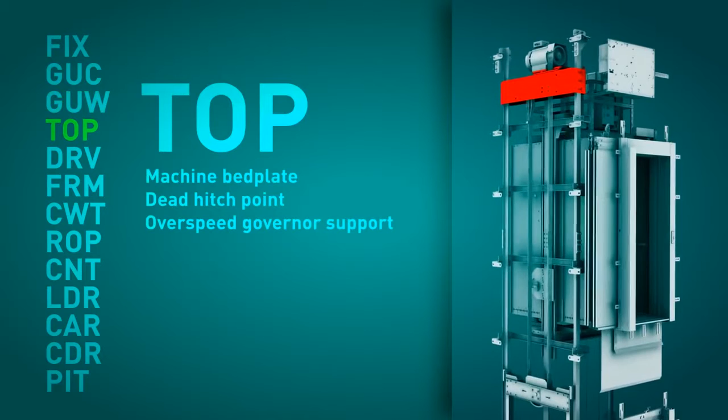Each module can be made up of one or more packages. These packages are identified with a description of the module and its position within the assembly sequence. The supply of the elevator has been designed to fit what we consider to be the logical assembly sequence of a machine roomless elevator.

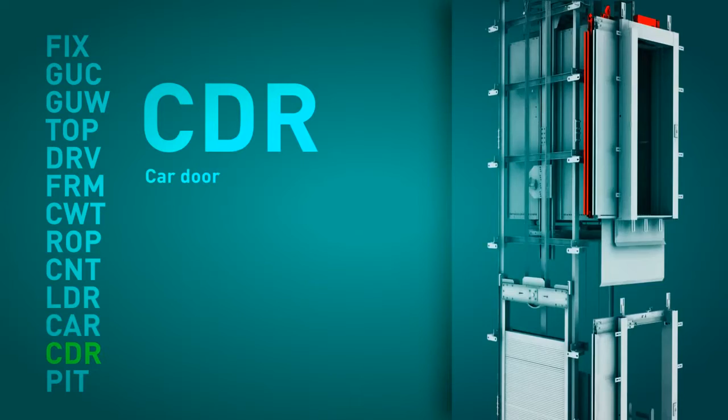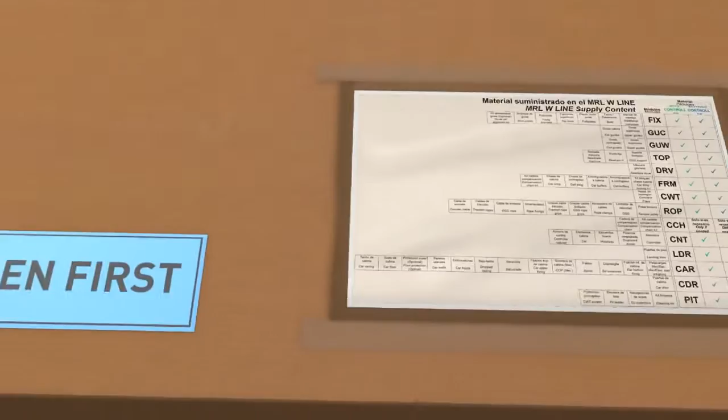The package that we have to open first is labeled and easily identifiable. Attached to this package, in a protective plastic cover, is the packing list and a document which details and lists the material supplied in each of the various modules.

In this first package, we can find the assembly manual of the elevator and all the assembly handbooks of the individual components. Before starting the assembly process, we strongly recommend the assembly technicians read all the manuals in detail.

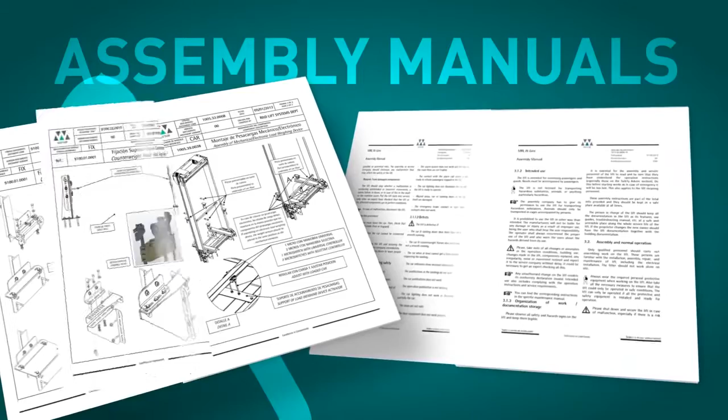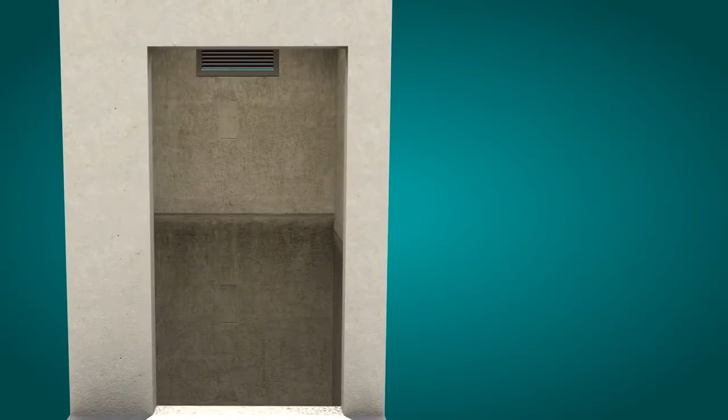The assembly of the MRL W LINE starts by checking that the conditions of the shaft, dimensions, cleanliness are satisfactory and that all the necessary material and auxiliary tools are available on site. The guide rail sole plate must be correctly positioned and levelled according to the assembly manual.

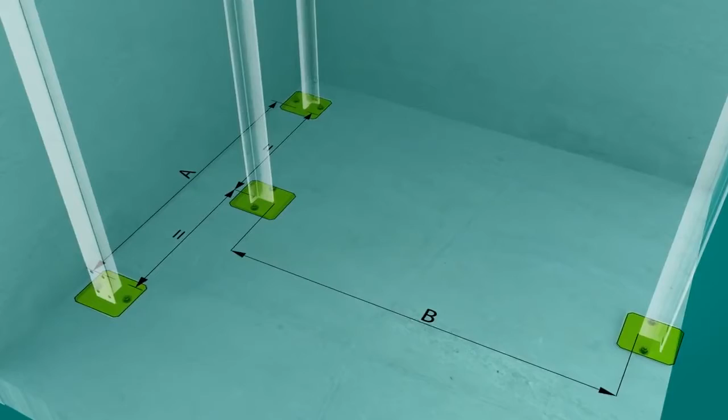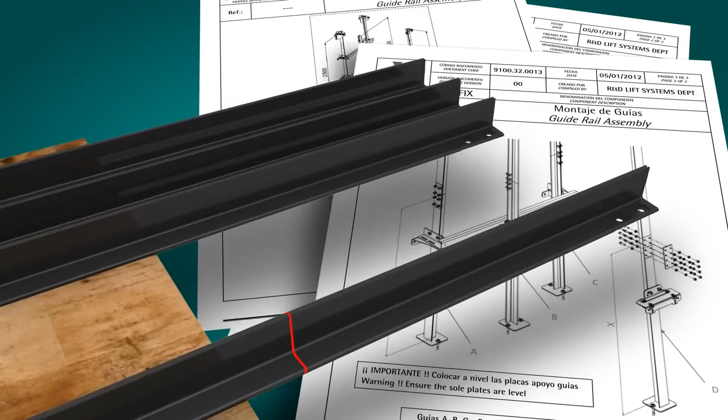The bottom portions of the car and counterweight guide rails are cut and assembled according to the installation drawings. Should there be a difference between the pit depth given in the installation drawings and the as-built depth, the bottom guide rail can be adjusted and cut to the right length.

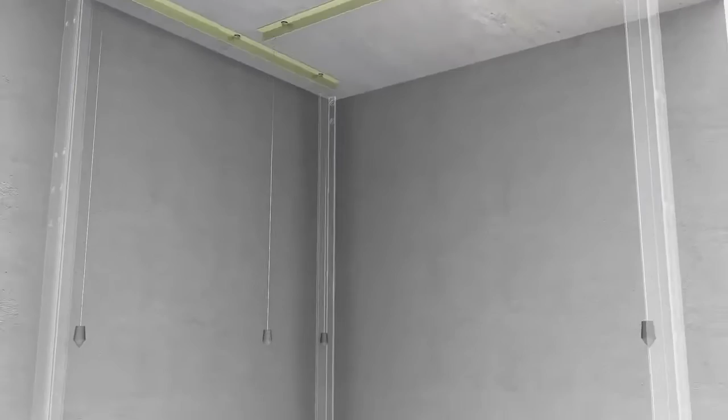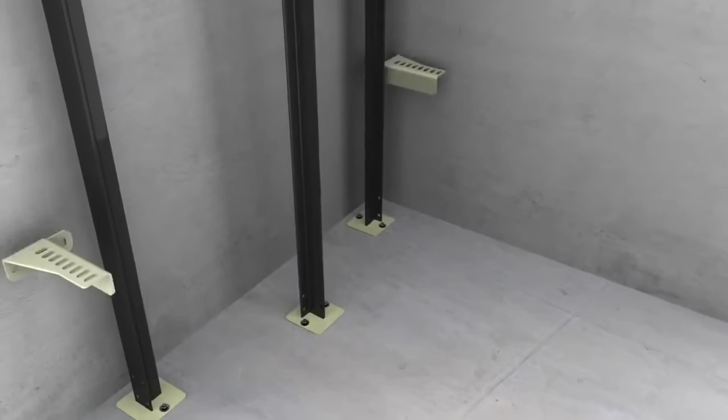A tool to help align the guide rails is recommended in order to guarantee a correct assembly. Wittur can supply a guide rail alignment kit upon request. The first row of guide rail supports is assembled. Their position is detailed in the installation manual.

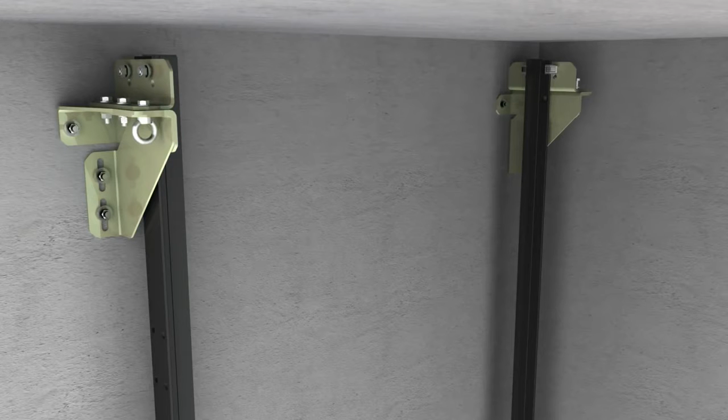With the help of some scaffold platforms, the successive guide rail portions, 2.5 meters or 5 meters, are assembled with their corresponding support brackets. Once the last section of the counterweight guide rail has been assembled, the topmost bracket can be fixed into place. The last portion of the car guide rail fixed to the bed plate is assembled once the machine support has been installed.

Alternatively, the process of assembling the guide rails can be carried out from a temporary platform which is fixed to the guide rails that have already been mounted and lifted up through the shaft by means of a block and tackle.

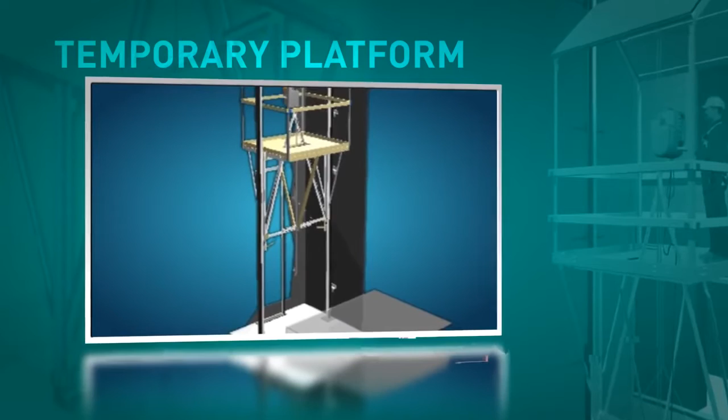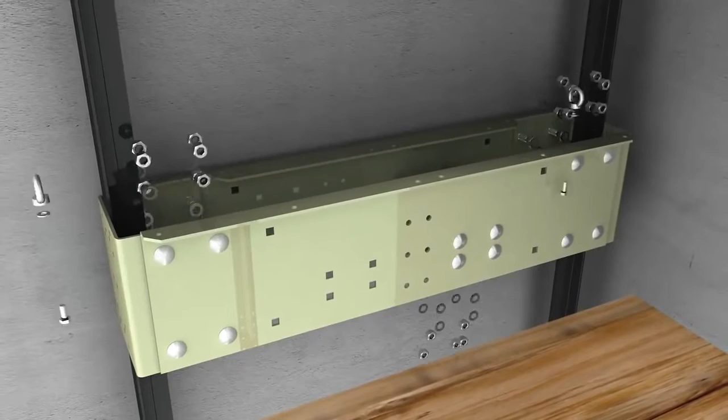The machine bed plate is assembled next. A comfort kit is standard supply for 1.6 meters per second, but optional, though highly recommended, for 1 meter per second. These low-frequency metallic cushions absorb any vibrations that the system may produce.

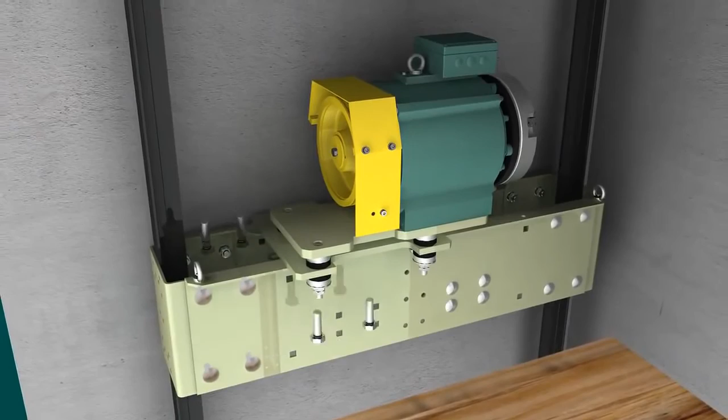The machine is fixed to its support and is lifted and guided into position with the help of a block and tackle. It is fixed to the sheave side with the fixings provided, and once the machine is level, these fixings and the clamp can be tightened. Once the machine is in place, the penultimate guide rail support and the last section of car guide rail fixed to the bed plate can be assembled.

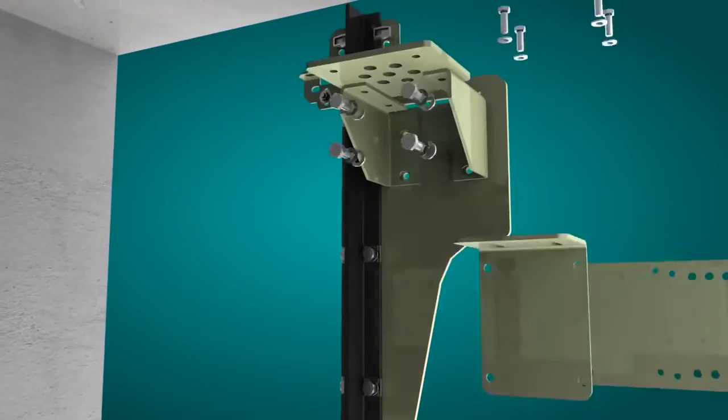The dead hitch point can now be assembled, followed by the overspeed governor and the slack cable control device, should it be applicable. At this point, all the mechanical elements of the elevator are assembled in the headroom.

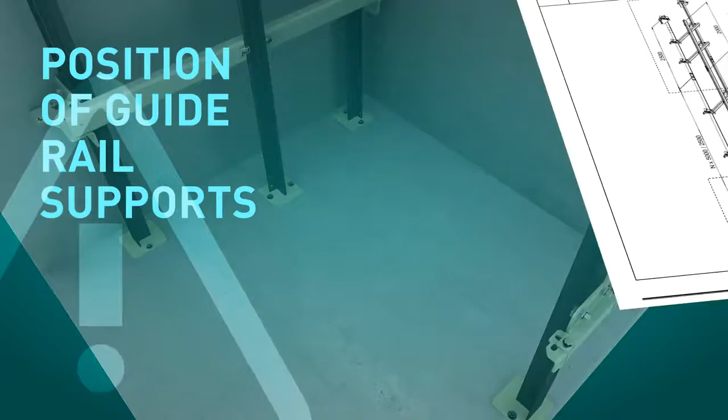All the guide rail supports must be placed in the positions detailed in the installation drawings. The position of the top and bottom brackets is of special importance. Any scaffolding and platforms should be removed at this point. It is now time to go into the pit.

In the module FRM, we will find all the components relating to the car and counterweight frames and the buffers. The counterweight buffers should be assembled first of all in the position detailed in the installation drawings. Resting on its buffers, the counterweight frame is then assembled.

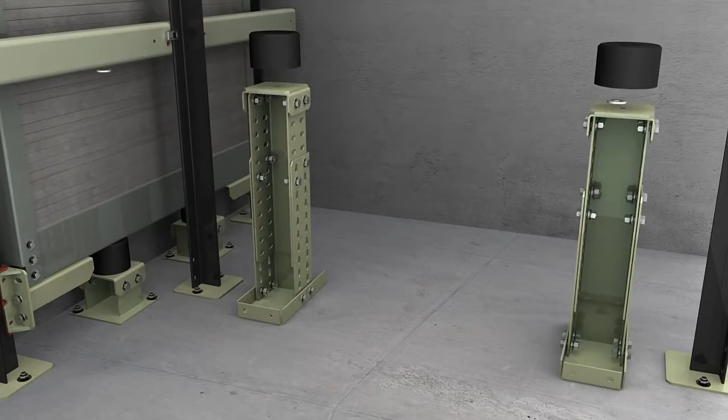A partial loading of the counterweight should then be carried out, according to the individual assembly requirements of each elevator. The car buffers are assembled next, in the position detailed in the installation drawings. Resting on its buffers, and on the car floor, the car frame is assembled. As an optional accessory, Wittur offers a temporary protection to protect the car floor whilst the assembly process is taking

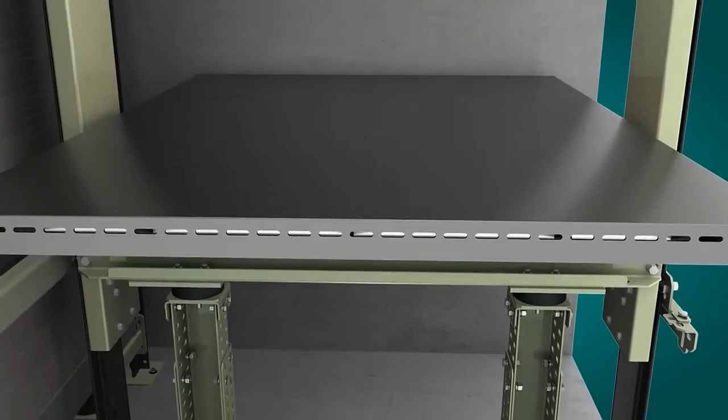place. The slings are now correctly assembled and positioned within the shaft and between the guide rails, and it is time to suspend the car slings in order to assemble the traction ropes. All the necessary material is supplied in the module ROP. The machine should previously have been connected to the power with the encoder cable.

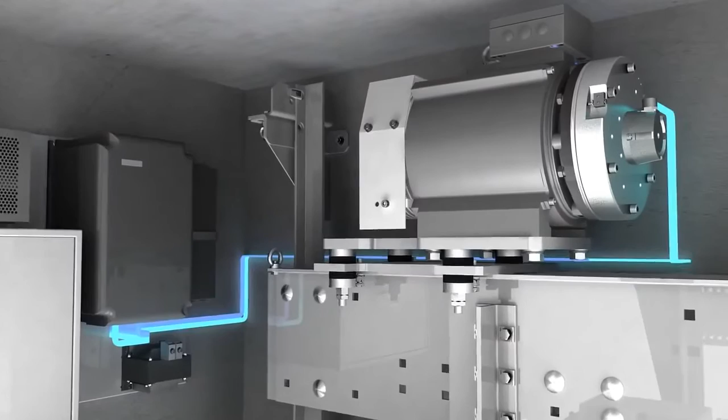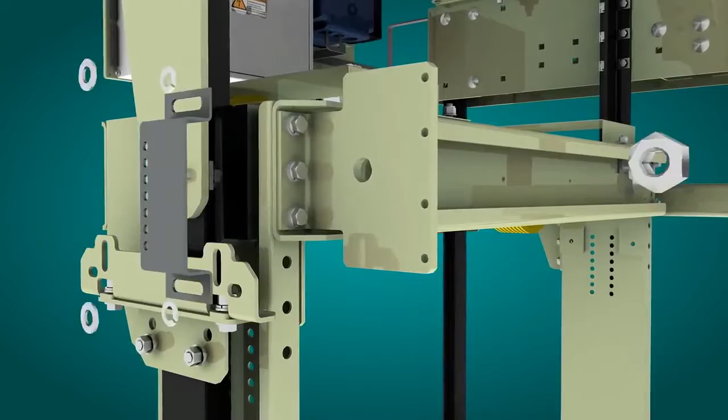The car sling is then lifted with a block and tackle to the highest floor that allows the floor of the car to lie flush with the landing FFL. Its position is maintained by means of the car frame locking kit. This element has not been designed to specifically suspend the car, but to fulfill the function indicated in clause 6.4.3.1 of the standard EN 81-1 A3.

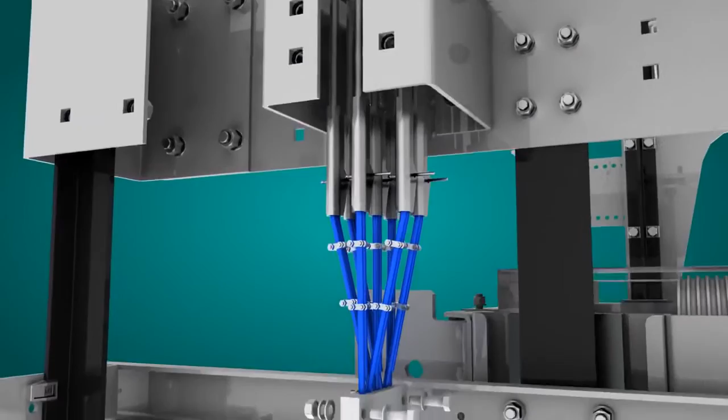For the assembling of the traction ropes, please follow the instructions detailed in the elevator's installation manual. Repeat the process as many times as needed. A rope clasp guarantees the correct alignment of the ropes as they are fed into the grooves of the sheave.

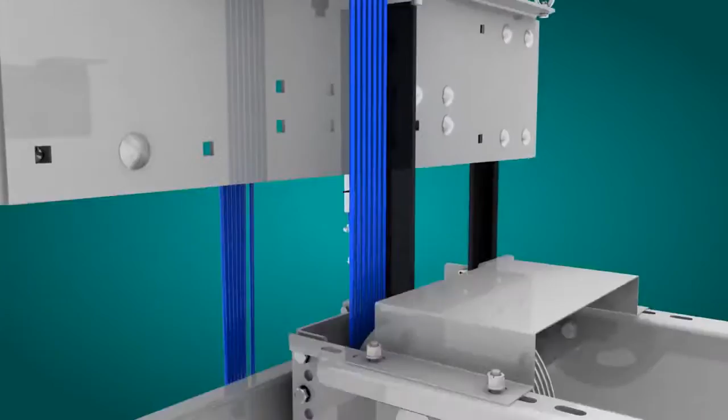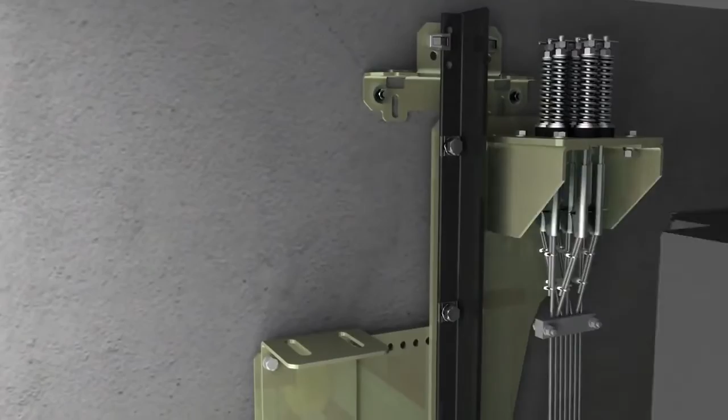The next step is the assembly of the overspeed governor, its tension weight and the cable that joins them. The fixing of the overspeed governor cable to the frame is the last stage of this subassembly. At this stage, the elevator can be used as an elevating platform with the use of an assembly operating panel. The elevator must be handled with great care during these journeys. With the help of the elevating platform, the landing doors are assembled.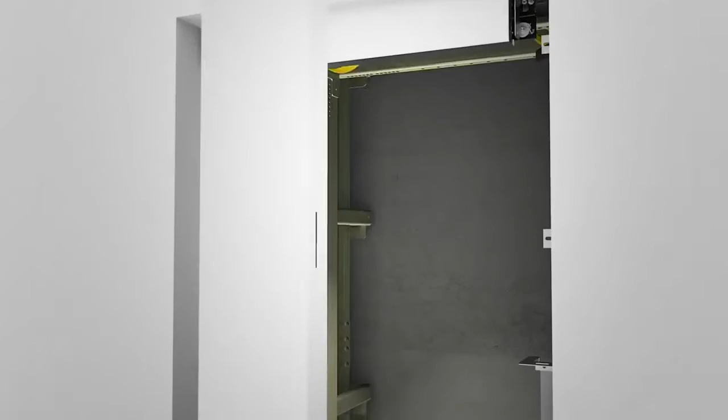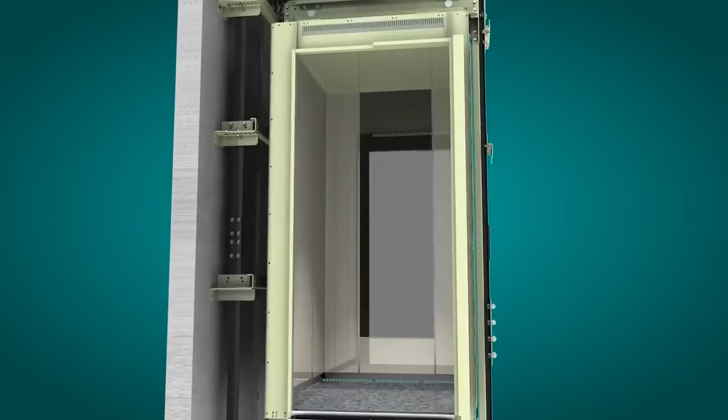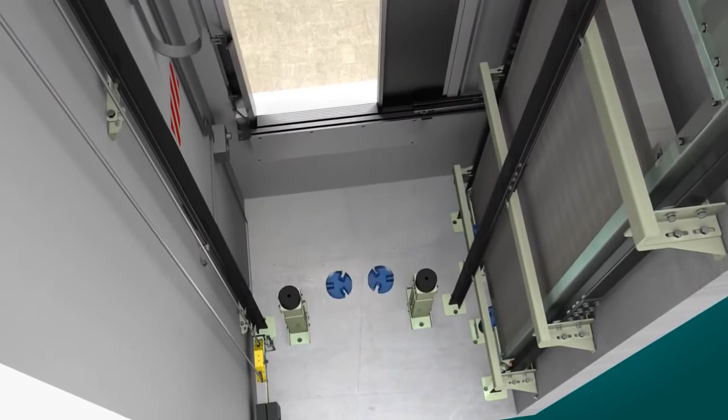Before starting the assembly of the car, it is essential to mechanically block the car frame and to remove the floor protection should it have been used. It is now time to assemble the car door. The pit components can now be put into place. The counterweight screen is fixed to the guide rails, and should it be applicable, the pit ladder is fixed inside the pit. From this point onwards, the electrical elements can be assembled.

The MRLW line controller, with its plug-and-play concept, is probably one of the market's most easy and intuitive controllers to install. It is delivered perfectly packed and identified in 4 packages: power and control, pre-assembled electrical installation of the shaft, electrical elements of the car, and the controller cabinet. In each of these packages there are various assembly kits, each one accompanied by a description of its contents and an assembly manual, numbered according to the assembly sequence.

The controller cabinet, with its reduced dimensions, is placed neatly in front of the frame of the landing door located on the last floor. The simplicity of the controller does not reflect its features. The MRLW line controller can be supplied also according to other standards, such as EN 81-70 and EN 81-73. Upon request, it can also be adapted to the EN 81-71 and EN 81-72.

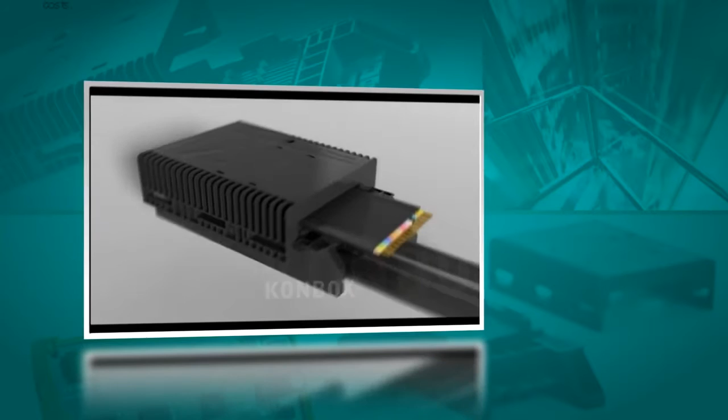Our pre-assembled electrical installation uses the KONBOX system, which greatly reduces the assembly time, guarantees the quality of the CAN bus signals, and sets us apart from our competitors. The flat cable is manufactured with highly resistant and durable materials, which guarantee an optimal protection of the low-frequency CAN bus signals. An absolute positioning system of the car by means of a 4096 pulse encoder is optional. This makes assembly easier and guarantees millimetric precision of each stop.

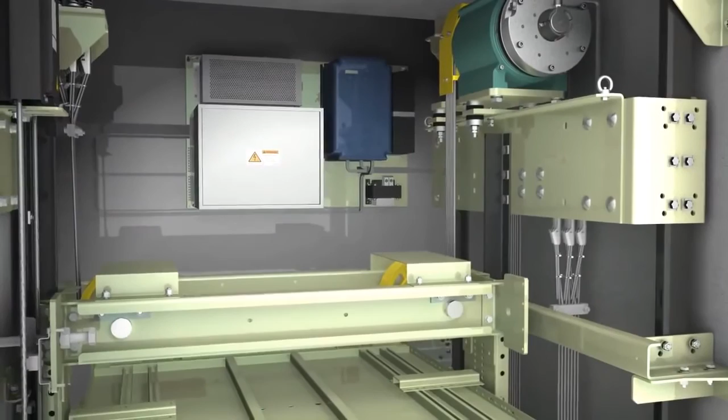The penultimate task is the important one of cleaning the shaft and the pit, and of oiling the guide rails. Finally, before the lift can be put into service, the MRLW line must be submitted to a series of tests, according to Annex D of the EN 81-1 A3, in order to ensure the perfect functionality and safety of the lift. Wittur supplies a specific document which guides the assembly technician through all the steps that must be carried out.

Wittur has been issued by AENOR a conformity certificate, confirming the implementation and maintenance of a quality assurance system for the design, manufacturing and final testing of elevators, and certifying that it complies with the requirements of Annex 1 of the Lift Directive 95/16/EC. This means that any assembly company with a quality assurance system compliant with the Annexes 12 Module E or 14 Module D of the Lift Directive 95/16/EC can put the lift into service and

certify it accordingly. Wittur can also supply the necessary documentation allowing any assembly company without a quality assurance certificate the possibility of certifying the elevator through an external notified body according to Annex 6